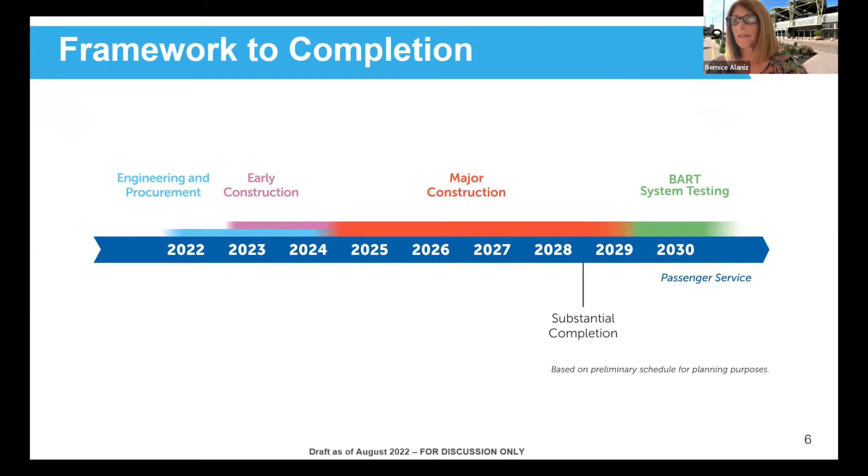So there are 3 major activities going on right now, and that is advancing the design. FTA issued a letter of intent back last October, and we have 2 years to advance those contracts and come back with a more firm cost and schedule. We are in the midst of what is called the 90-day innovation period. We pursued progressive design build for the tunnel and track work contract, and what that does is it enables us, the owner, to engage more key stakeholders in the community as we advance design.

It provides more input into that. And concurrently, we're conducting a peer review. And then we're also concurrently conducting opportunities to refine the stations and maximize the TOD opportunities around those station areas and entrances to the stations. And I think that's it.

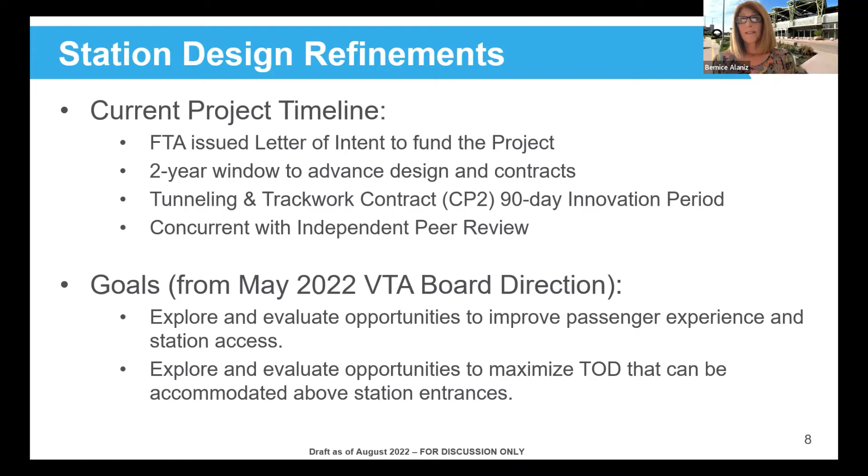And I'm going to pass it back to Doug. Do I have one more slide, Doug? Nope, I was good. Hey, that's it, thanks. Bernice. Thank you. And with that, I'm just going to pass it over to Peter. He's a lead architect for the project. He's going to talk about station design and next steps. So Peter, over to you. Thank you, Doug. Can everyone hear me okay? Sounds good. Cool. Thank you.

I'm going to run through the current station designs for downtown and Diridon, and then also talk a bit about the refinements process that we've been going through with the city and with Spur. But just to get everyone on a level playing field, I'll run through the current station designs. The downtown and Diridon are both urban stations, meaning they are for people coming by foot, by bike, or by transit, not parking your car and going into the station from there. There's a lot of ancillary facilities or back of house areas in these stations, about 50,000 square feet in each of them, which have to be considered.

And also the ongoing maintenance requirements for all of the back of house facilities is an important part of the planning for the station. So even though it's not something that people see on a day-to-day level, it certainly impacts the overall station design. And then an important factor for all of the stations has been the consideration of how to integrate on-site TOD, or transit-oriented development, into the designs of the station wherever possible. So that's been definitely a key consideration at both downtown and Diridon.

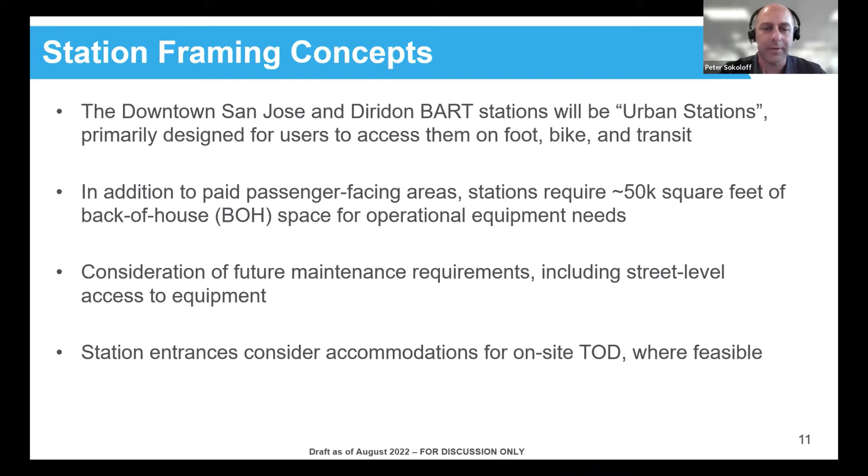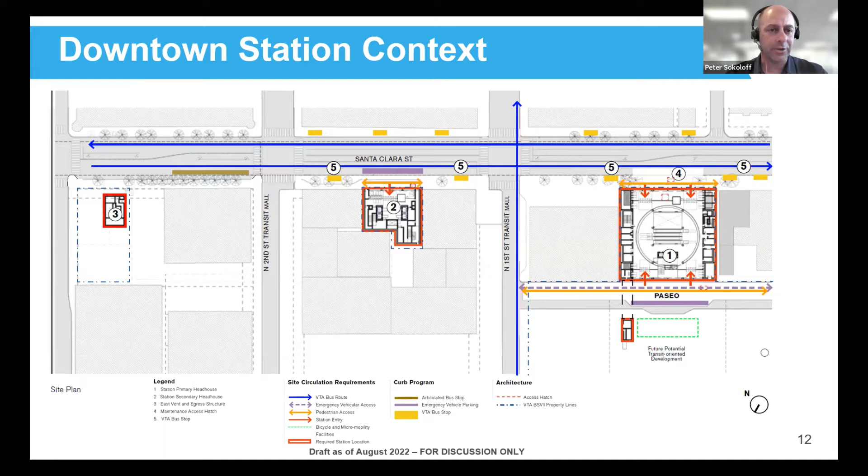This is an overall site plan or area plan to provide some context for the downtown station. There are 3 primary facilities that are part of the station. The main or primary head house is the larger one on the right-hand side of the page, which has entrances both onto Santa Clara Street and from the future plaza that's anticipated as part of the VTA block development between Market and First. Then there's a second entrance to the station between First and Second Street, also on the north side of Santa Clara Street, which is elevator only access, whereas the primary head house has multiple escalators. And then there's also a ventilation and egress structure between Second and Third.

If we go to the next slide.

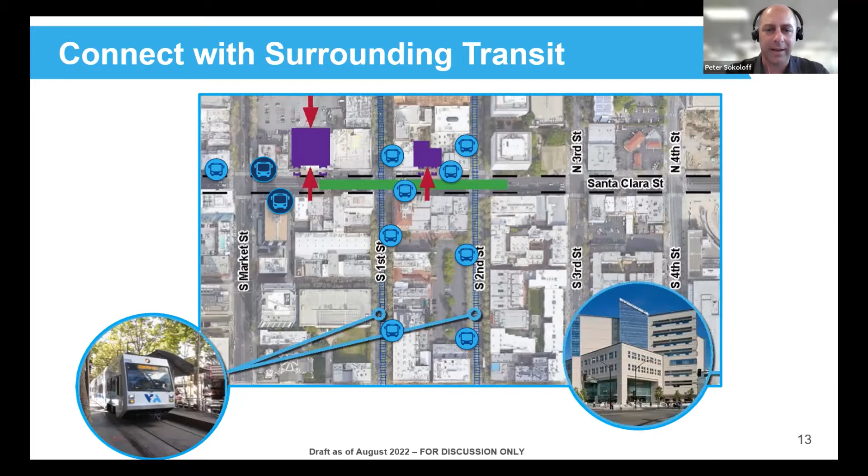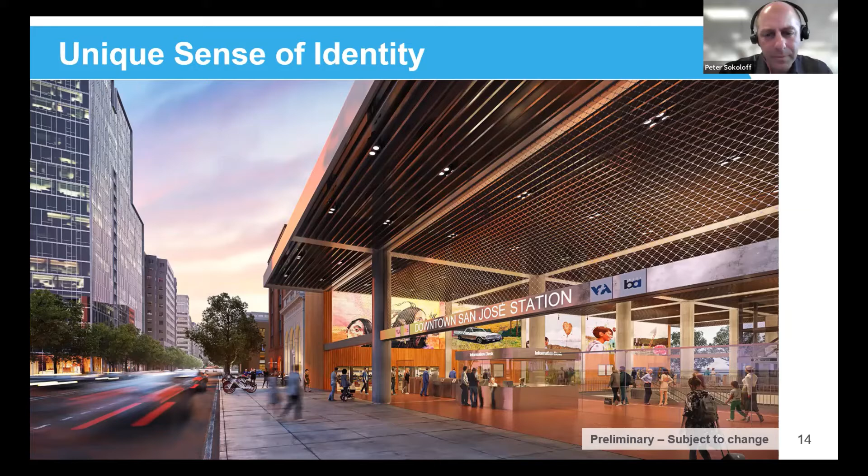Other things that have helped shape the station design have been the design review committee process, where we engaged with multiple stakeholders and got a lot of input about materials and finishes, as well as opportunities for public art, which you can see in this image. The surfaces of the ground level of the head house could be used for murals or other types of art, which would be picked at a later time, but still important to consider as part of the overall design.

Both Diridon and Downtown, the design intends to celebrate the structure of the buildings, their deep stations, so that they both have circular shafts which go down to platform level. We want to keep them as open as possible, light and airy, so we get natural daylight coming down, as well as visual connectivity for passengers to see intuitively where they need to go.

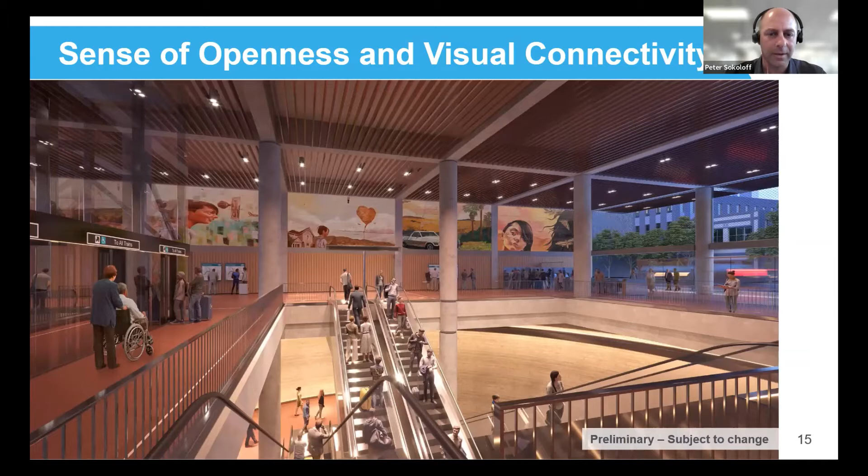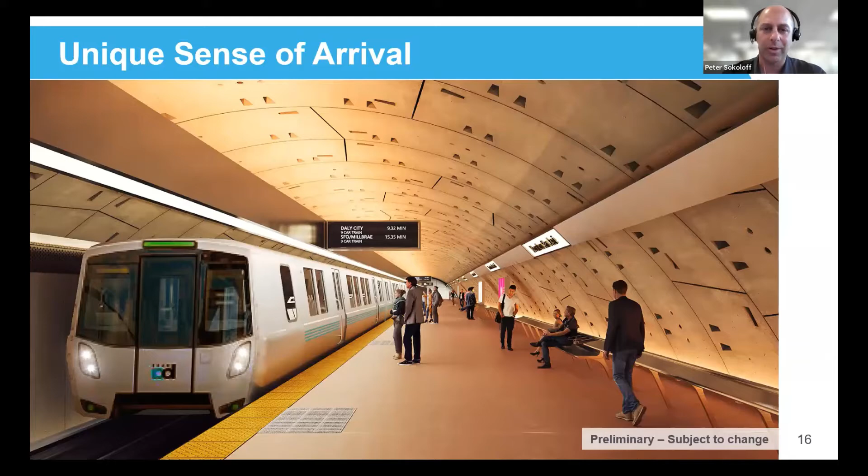At the platform level, again, we wanted to celebrate and expose the structure of the large single bore tunnel, so the precast panels that are part of that excavation and construction are exposed, and that's really the material finish for the platforms.

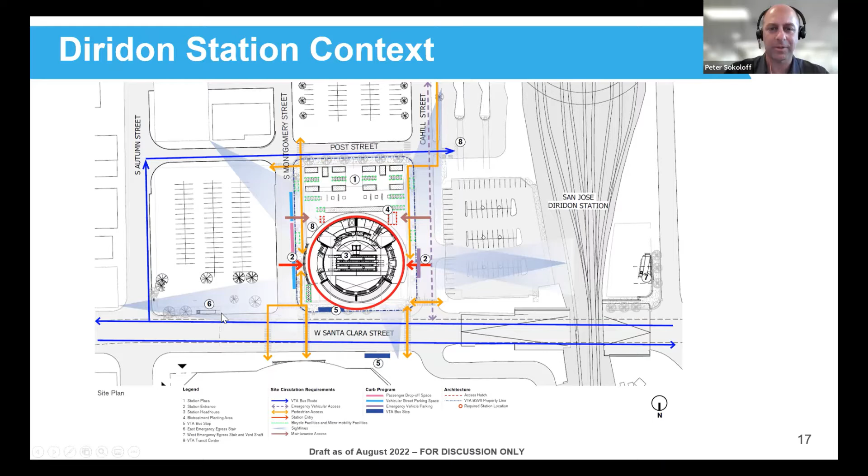Here there's also a ventilation and egress structure, number 7 on the slide on the right-hand side, and an egress stair off of Santa Clara Street, number 6 on the slide. But the primary entrance to the station is through the circular head house at the middle of the page.

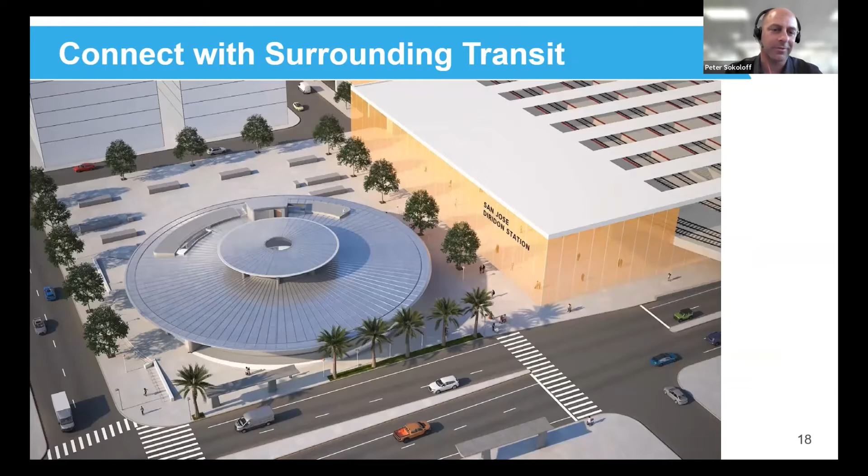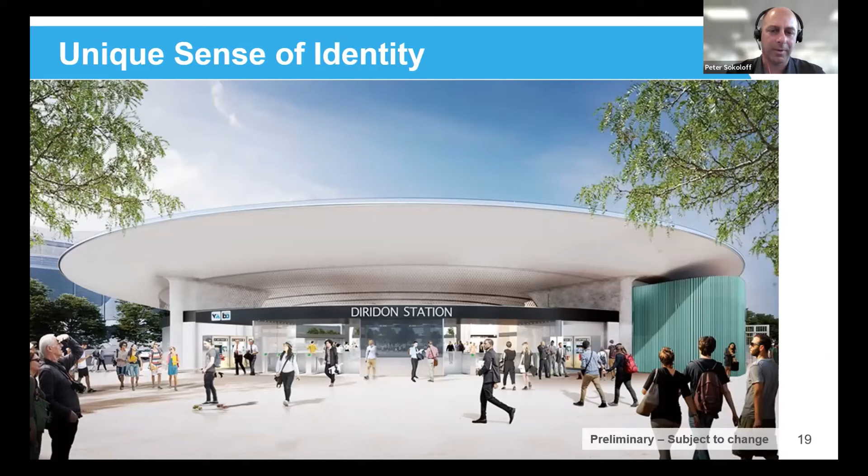This is now looking as if you were leaving the intermodal station and entering BART. This would be one of the primary entrances. Now, once you've gone through the fare gates...

Through the design review committee process, each of the stations started to take on more unique characters. The walls you see on the right-hand side of the image carry all the way down into the deep shaft, and the color of those terracotta panels is a mixture of the BART and VTA logos, as well as the San Jose Sharks colors.

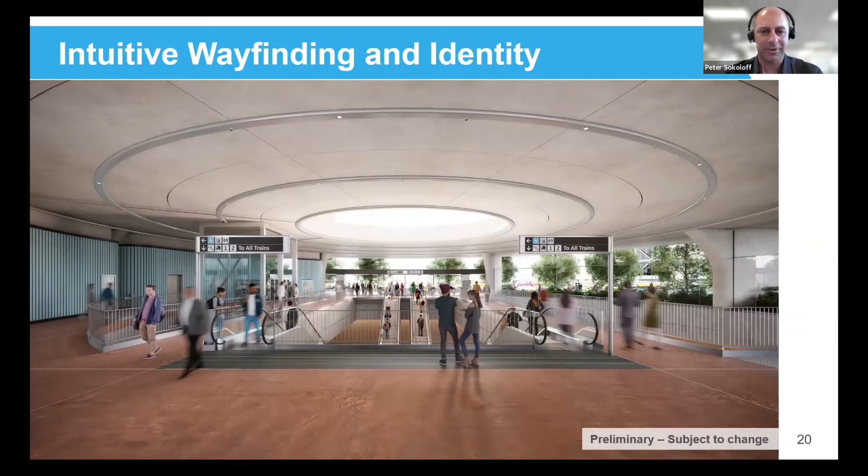So that helps to identify this station from the others. You can see here we're trying to use the same themes of openness, celebrating the circular shaft, and creating as much openness for natural daylight to come down, as well as intuitive path of travel. There's a stair that goes around the perimeter of the drum, which you can see on the right-hand side, and then a single switchback on the escalators to get down to the upper platform level.

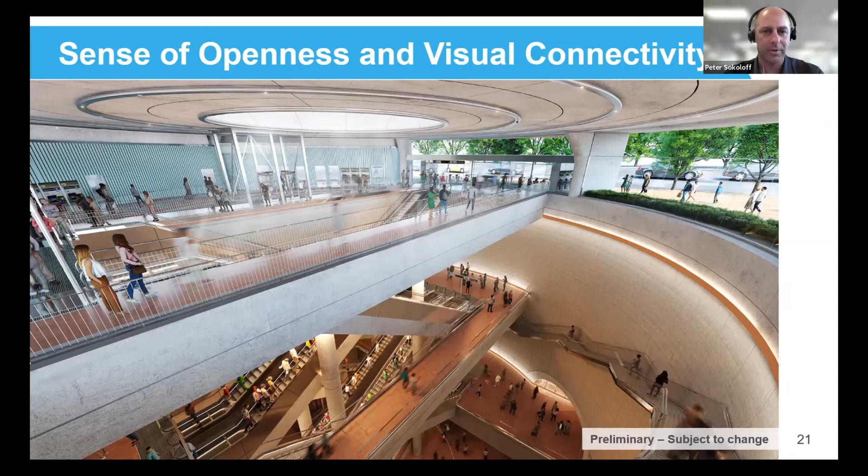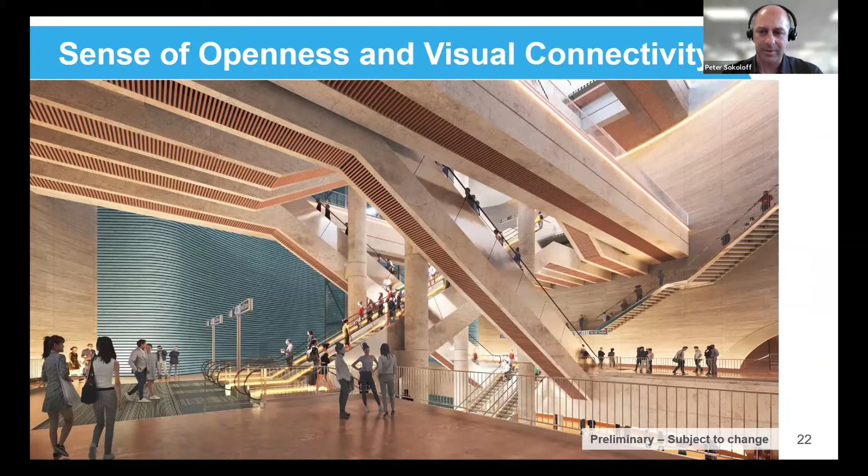If you go to the next slide, that shows the landing at the upper platform level, looking back at that feature wall I was describing earlier, and that is also where the elevators are located. On the right-hand side of the image, you can see the opening to the upper platform.

Go to the next slide. As Bernice described, we've been going through a series of design refinements over the past couple of months. Go to the next slide.

It's part of the approval to proceed with the CP2 contract. Part of that language was to conduct a series of workshops with the city of San Jose to explore how we might refine the station designs.

We want to improve connectivity for riders between transit systems, particularly at Diridon. At downtown, we're looking at potential for improving pedestrian safety by introducing a potential entrance on the southern side of Santa Clara Street.

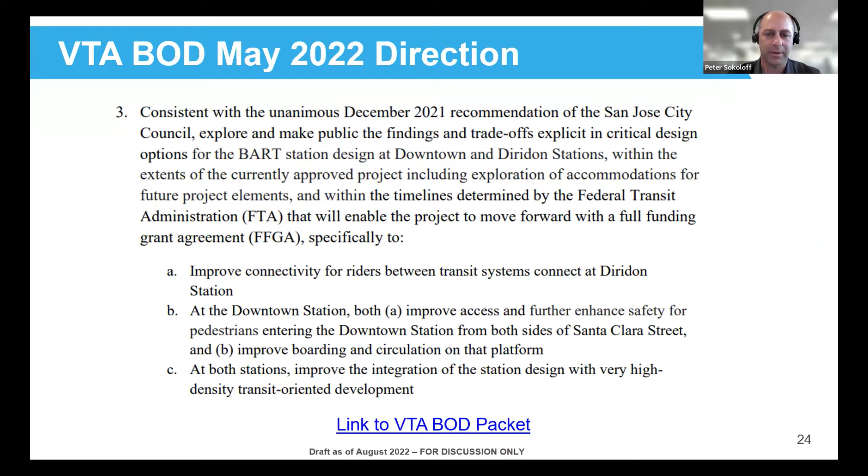As well as at both stations, looking at ways we could try to improve any integration of high density TOD. You go to the next slide.

Some of the guiding principles are that with these refinements, they all have to stay within the overall project footprint. They have to be buildable, operable, and maintainable, meet our sustainability goals, and also be cost effective.

In terms of meeting all of the budget requirements, we've been trying to evaluate all the options we've been developing based on that criteria. You go to the next slide.

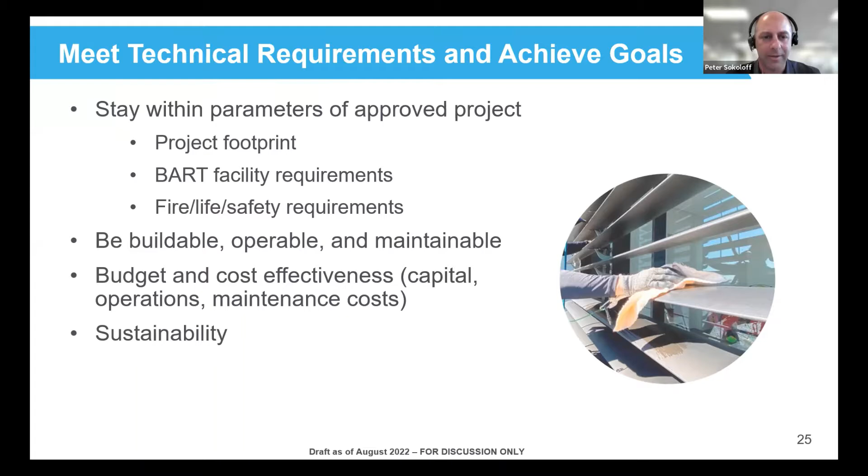One of the main things we've been exploring with the primary entrances for both downtown and Diridon is looking at different shaft configurations, exploring whether a rectangular shaft could potentially either improve vertical circulation experience or provide further potential for TOD.

Than the circular shaft. We've also been exploring potential secondary entrance locations. As I mentioned, at downtown that would primarily be to explore a southern entrance.

One of the key constraints has been that many of the sites along the southern part of Santa Clara Street in that particular area are historic resources, but we're also looking at ways to try to work either with that or find other sites.

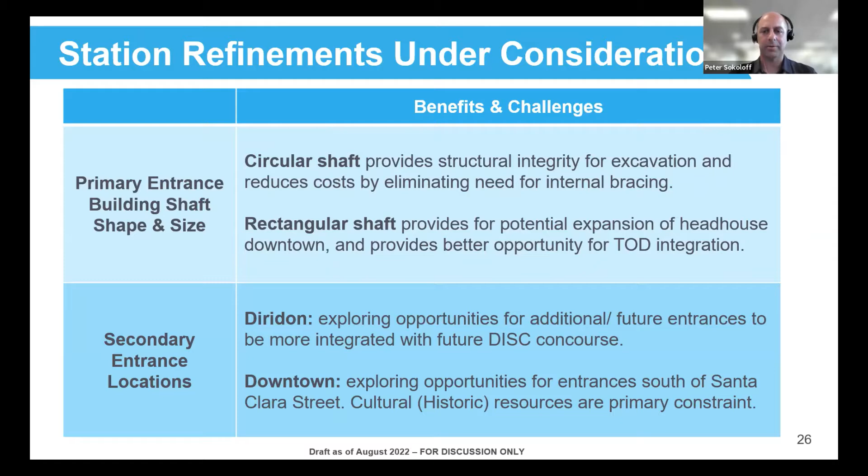And then at Diridon, it's also about trying to find those additional entrances that would best integrate with the future DISC project. Next.

Once we've started to narrow down some of those options we're exploring, we've also been working to agree on a series of evaluation criteria to measure and judge the different options from a passenger experience perspective.

Looking at everything from the way they integrate with their surroundings, to which has the shortest and easiest travel time, to implementation metrics like whether it's within cost and how constructible it is.

So there's a table we're working on developing that we'll use to score these different options. We're also using a lot of the criteria from BART in terms of passenger experience.

Looking at different types of users and making sure we're considering all of their needs as well when we're looking at the different options. And if you go to the next slide,

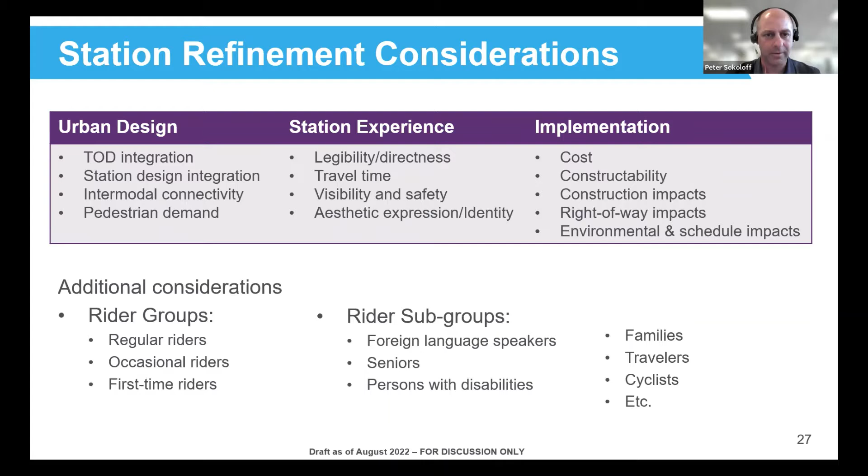We're currently in this public engagement period. We'll then go to a period of internal VTA review, and then there'll be more engagement and workshops, and ultimately VTA board meetings to share the results from this refinement process.

Going back to the passenger experience evaluation criteria, this is a sample of some of the things we have agreed with or developed along with the city and SPUR to describe what we think are important for passenger experience.

We'll be looking for your input on these as we go to the second, more hands-on portion of the meeting. You go to the next slide, and that takes us straight to the polling questions.

So I'll hand back to Doug. Great, thank you, Peter. This, as Peter mentioned, is the part of the meeting where we're transitioning to focusing on hearing from you.

First, we have some polling questions we'd like to ask you. They're intended to provide us with information the VTA may use to inform the next phases of station design, and to get you thinking about how you and others may use the stations, so they have user perspectives fresh in mind for the small group breakout discussions that'll follow.

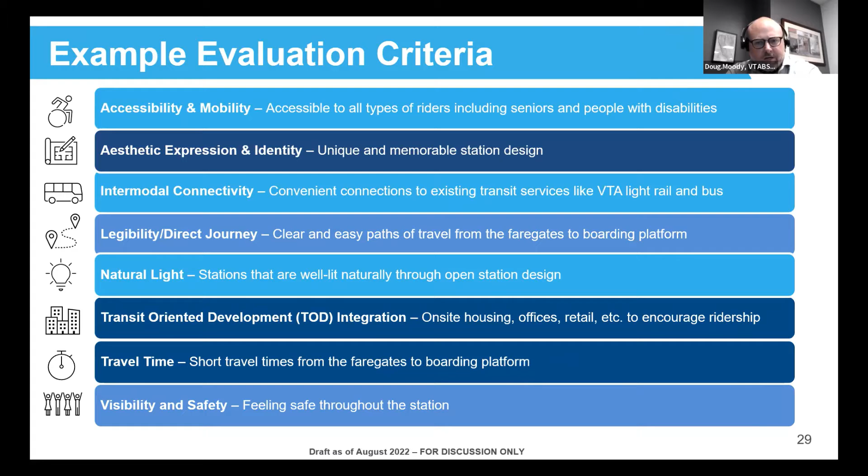We'd like to talk with the small groups about whether your group disagrees with the results from the larger room, and why. Near the end of the small group breakouts, we'll ask each room to pick a CWG member to report back to the larger group about some of the key things the small groups talked about. So with that, let's jump into the polling questions.

Some of these questions are focused on both stations, and some are specifically about the downtown or Diridon stations. This first question is focused on both stations, about the trade-offs between station design refinements and associated potential project delays. The framing statement above states: station design refinements could delay the project schedule due to additional requirements such as environmental clearance or construction duration. We want to hear from you.

Do you want BART to be operational as soon as possible, even if that means some desires aren't incorporated? Do you think a couple years of delay is okay to incorporate some high priority desires? Or do you want to make sure every desire is incorporated, even if the project is delayed by many years?

I'll give a little time for folks to enter their answers. Once I start to see it stabilize, I usually do a 5-second countdown to let folks know to get their answers in. I'm still seeing some answers come in. Seeing it start to stabilize, and we'll share the results in 5, 4, 3, 2, 1.

Kristen, would you please share the results? Adriana's going to take a screenshot of these, as our facilitators in the small groups. We'll have these results available to talk through with you in your small group sessions. On to the next question.

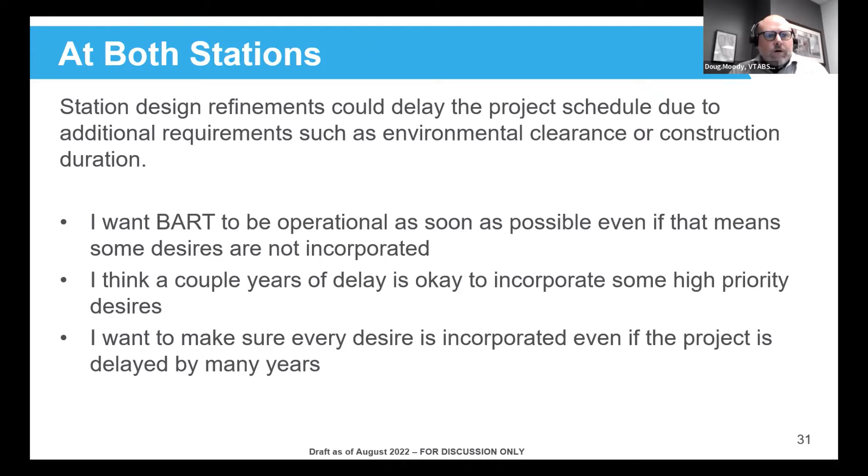This one's focused specifically on the downtown station, about the trade-offs between design refinements and the closure of Santa Clara Street. We'll ask the same question about Diridon next. The framing statement: to accomplish some suggested design refinements, closure of Santa Clara Street may be required.

There's the poll. Would you not want Santa Clara Street to be closed at all? Are you okay with Santa Clara Street being closed for a few months, for a few years? Or are you okay with closing Santa Clara Street for however long it takes to incorporate the desired refinements at the downtown station in particular?

And I'm seeing it stabilize. So 5, 4, 3, 2, 1.

Kristen, would you please share the results? Adriana, would you be sure to capture them? And then the next question—Kristen, did you get the results shared? Cool.

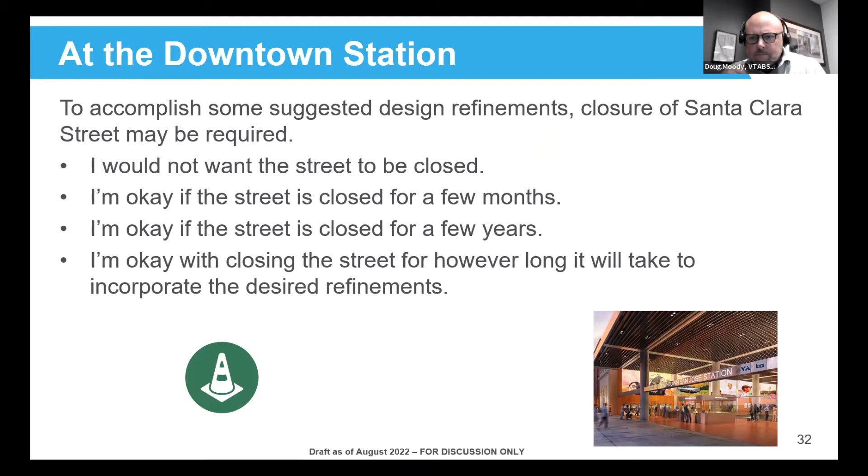Next question, at the Diridon station, the same question for Diridon: to accomplish some suggested design refinements, closure of Santa Clara Street may be required.

At Diridon, would you not want to see Santa Clara Street closed at all? Are you okay with it being closed for a few months, a few years? Or are you okay with closing Santa Clara Street however long it will take to incorporate the desired refinements?

And I'm seeing it stabilize. So 5, 4, 3, 2, 1.

Please share the results, Kristen. Adriana, please capture them.

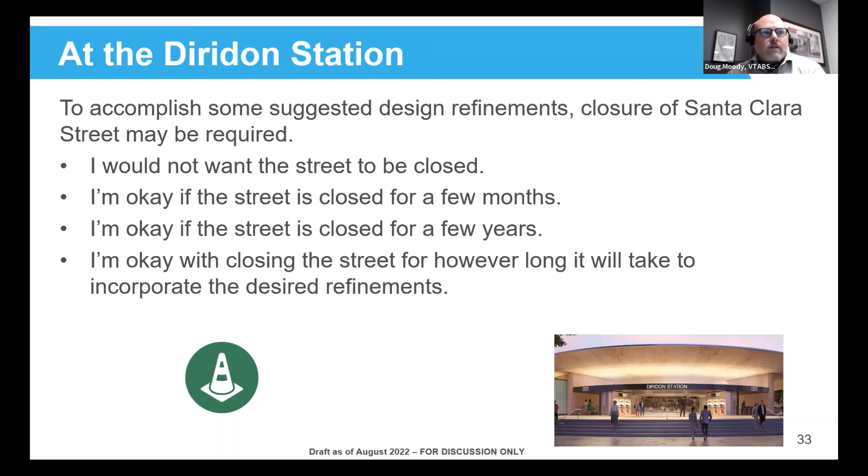Thank you very much. The theme of the next question is about preferences for entrances beyond or in addition to the primary entrance buildings, which, as Peter mentioned, have been designed to be centralized gateways between the stations and surrounding communities.

So the question for the downtown station in particular: when considering entrances beyond the primary entrance building, do you prefer an additional off-street entrance building? Are you okay with smaller sidewalk entrances that are typical in the BART system? Or do you think an additional entrance isn't necessary?

And I'm seeing it start to stabilize. So 5, 4, 3, 2, 1. Kristen, would you please share the results?

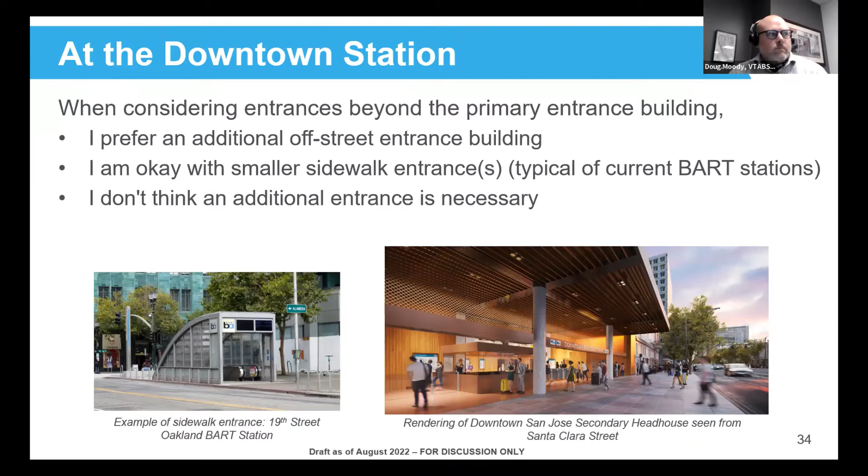Thank you very much. And the next slide. So same question for the Diridon station. When considering entrances beyond the primary entrance building, do you prefer an additional off-street entrance? Are you okay with smaller sidewalk entrances like in the current BART system? Or do you think an additional entrance isn't necessary?

Seeing responses stabilize. 5, 4, 3, 2, 1. Kristen, please share.

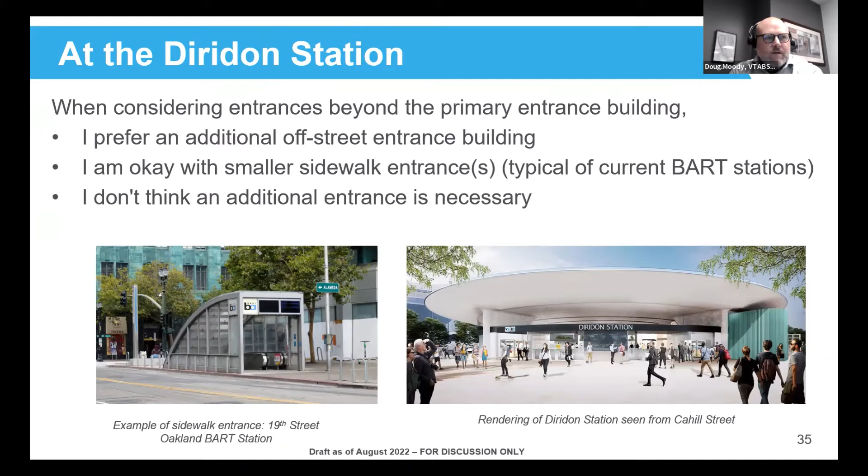Adriano, please capture. And then the last polling question before we get into the small group breakouts, and this is the question that we intend to be the thing that really drives the small group breakouts discussion, at least to start.

So we'll give it a little bit of time for the answers to stabilize.

Okay, seeing them start to stabilize. 5-second countdown for people to get the responses in. 5, 4, 3, 2, 1. Kristen, would you please share the results? And Adriano, please capture into the document for discussion in the breakout sessions that are up next.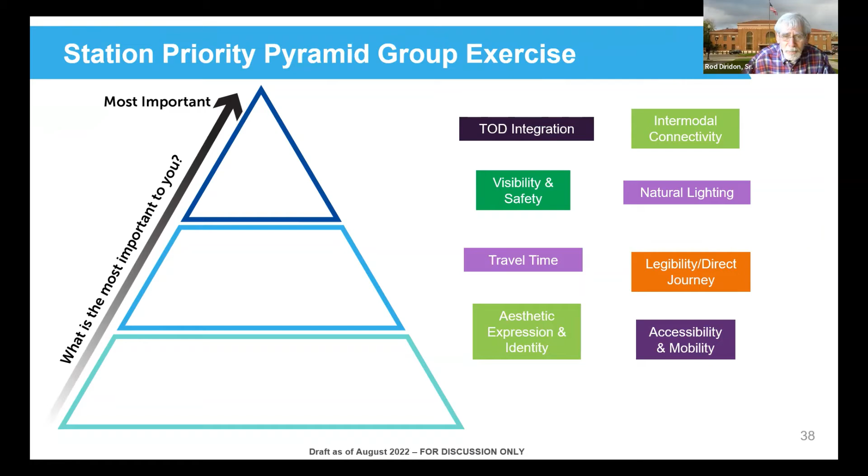Is Boris taking part in any of those conversations? The Northern California director? Boris has been involved in some of the conversations that we've had as to the DISC partnership. Good. Well, I wish I could give you more comfort in knowing what's going to happen, but I guess nobody does. But something's going to happen, and it's going to be big.

I'll also mention that intermodal connectivity is one of the categories here on this priority pyramid, and there is more time for us to be back together in a large group for discussion, so I think it's helpful. Thank you very much for that, Rod, and very appreciative that you're here.

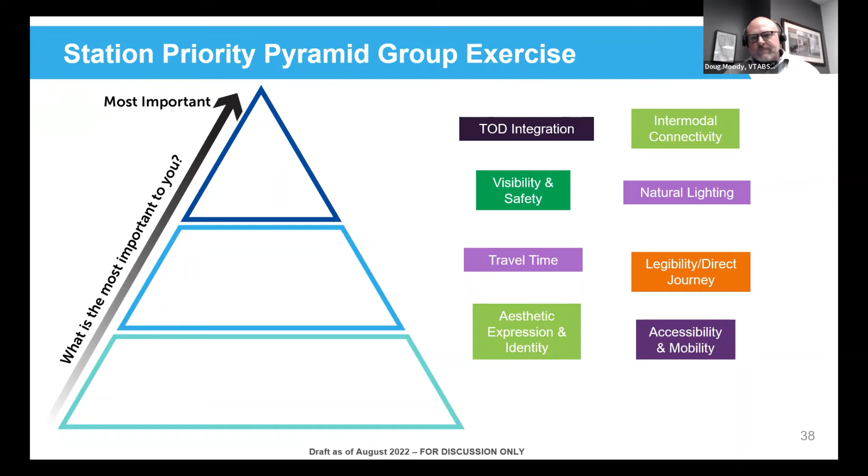Looks like we have everyone back. Nice to see you all on camera. Like Star Trek, we just got beamed back into the starship, the mothership. People are getting fired up, Doug. Fired up, that's good to hear. We like to hear that there's some passion. Yeah, I also, when you're all in the small groups, there's a small group of us who sit here in the main room, which I like to call the coffee and cookies table, if we were in an actual public meeting. So we got beamed back to the coffee and cookies table. Well, welcome back, everyone. It's not a bad place to be.

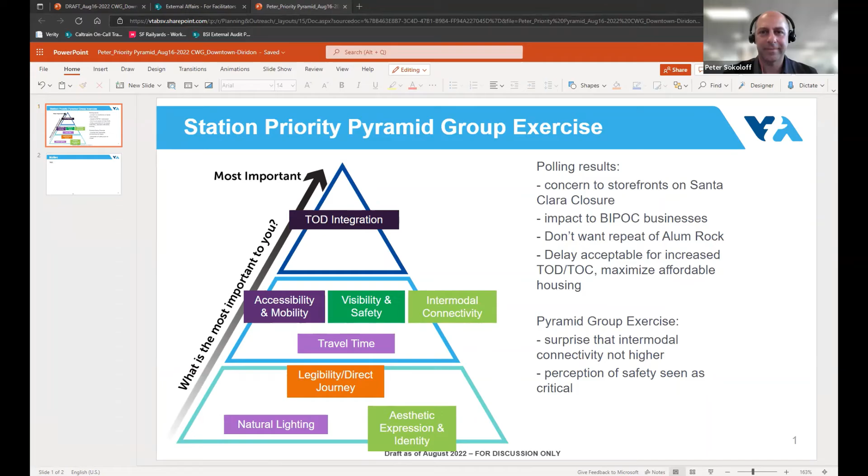Yes, I will share my screen. We were also in the middle of deciding who would be presenting, and we thought the best way would be a joint presentation. So with that said, I will pass it off to Elizabeth first, and then Alan, feel free to chime in as necessary.

Okay, we spent very little time on the poll questions because we wanted to focus on the priority pyramid group exercise. So what we did is first separate out visibility, safety, accessibility, and mobility options from the pyramid, because these are essential — they cannot be compromised and aren't really something we can prioritize. We put that in, and then, Alan, do you want to go first or second?

We should take turns. Yeah, the TOD integration to me is the time savings part. You have essential things you walk by: drugstores, pharmacies, dry cleaners, food. And that saves me another trip. I don't want to walk around the block or something — it needs to be on the way.

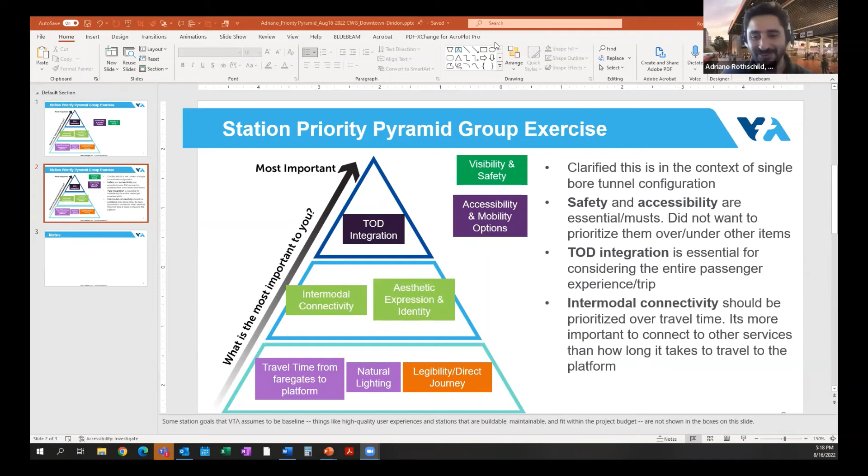Yes, and we have Adriano on ours. You guys see that okay? Yeah, so like the previous group, we thought that accessibility, mobility, visibility, and safety were must-haves, so we also put that as something that must be a part of anything.

So if you have something that you need to get into a great TOD building, but to get to the station you have to go through an impossible to find basement entrance. We shouldn't be compromising transportation to be able to do the TOD, but the TOD is fundamental. We thought that aesthetics and natural lighting are important and good, but we shouldn't be compromising the functionality of a TOD in an urban area and transportation, but should take whatever it is that is done and make that really beautiful, communicating the identity within the functional constraints.

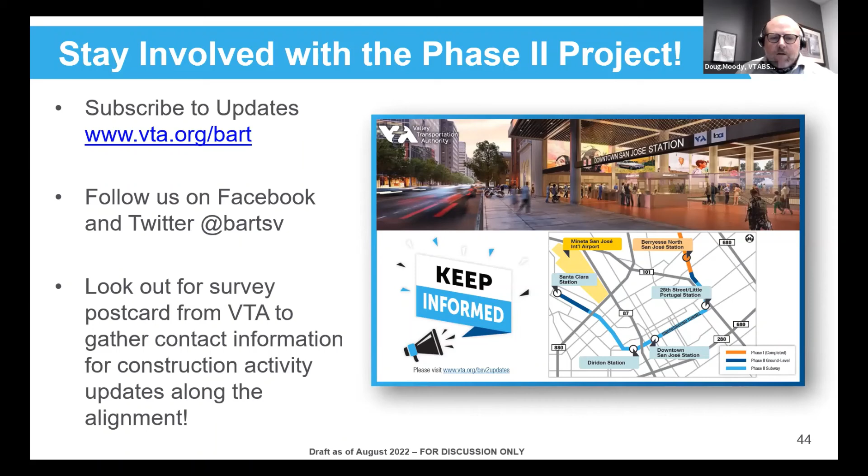I actually think that last bullet—we have sent out that survey, haven't we? People along the alignment should have gotten a postcard asking for their contact information, like email, phone, text, physical mail, and how they like to be communicated with.

Elizabeth had one last question in the chat: can slides from today be shared with the public? I think they normally are, but I'm not part of that process—Bernice or Kristen, do one of you want to take that? I think we used to at least post the actual presentation on the website as a follow-up to the meeting. I wasn't sure if Elizabeth meant the pyramids we came up with today, since I'm not sure those are finalized, but the presentation we shared today, we definitely post those. Okay, I meant the attachment that came with the email, that we usually post on the website. Okay, yes, thanks.

Jim, did I see you had a question? Did I read that right, that there's another CWG meeting in 4 weeks?

That's correct, yes. This one is - they're normally every quarter. These were originally billed as summer socials. Attendance has been down this round, but we think it's been dwindling largely because things are virtual. With COVID going away, we wanted to do something in person, but COVID came back, so we already had these billed, so we're having them. This is out of cycle, but the next one is the regular quarterly one, which we expect to go back to the regular format. These ones were really focused on telling the story of how the stations got to be designed to where they are, where they're going next, and collecting feedback so they can shape where they go next.